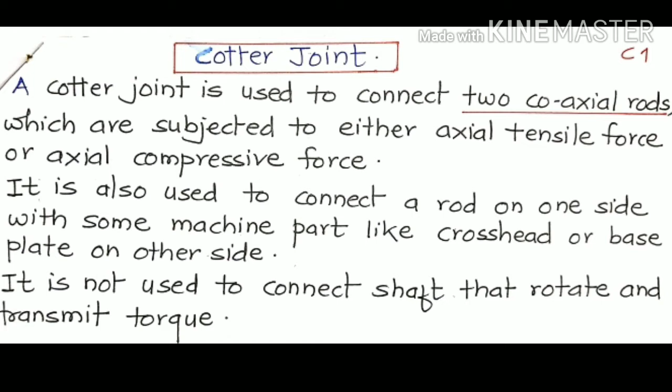So let us see what are its applications. Cotter joint is used between piston rod and crosshead of steam engine, also for a spindle and fork of valve mechanism, joint between piston rod and tail or pump, and is also used for foundation bolts too.

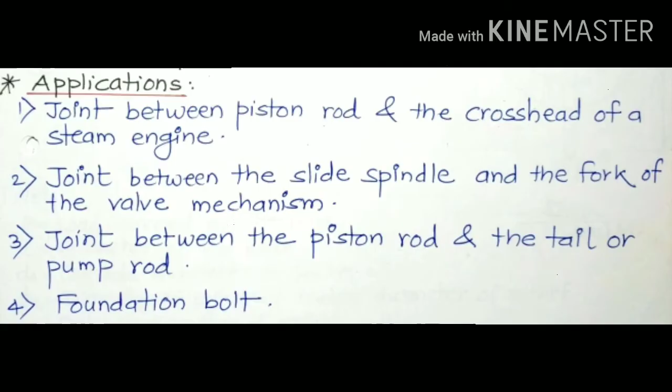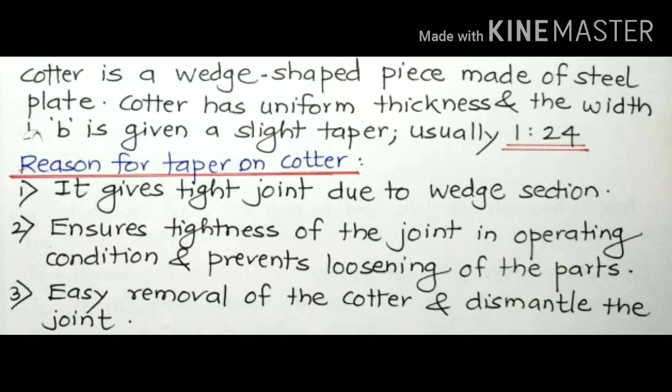Cotter is a wedge-shaped piece made of steel, having uniform thickness and given a taper on its width, that is 1:24. It is the joint between two parts which keeps it tight. It ensures tightness of the joint in operating condition and prevents loosening of the part, while also allowing easy removal of the cotter and dismantling of the joint.

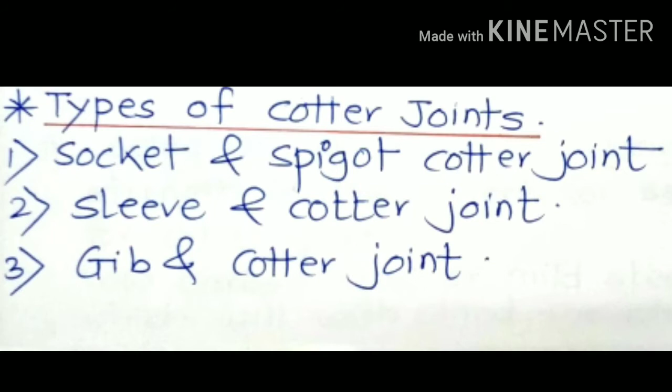There are various types of cotter joints. One is socket and spigot cotter joint, sleeve and cotter joint, and gib and cotter joint. Here we are going to discuss the socket and spigot cotter joint, so let us see how it is to be designed.

When a pull P is applied at both ends, spigot end and socket end, all these parts will be subjected to various stresses that we need to identify, and accordingly we will have to find out the area resisting these failures. Finding out the area resisting this failure is nothing but design, because design is finding out the minimum dimension which resists failure.

So if you look at the dimensions which we need to design here, or which we need to find dimensions of, these various parts are: one is rod, socket, spigot, cotter. So one by one we will see how it is to be designed.

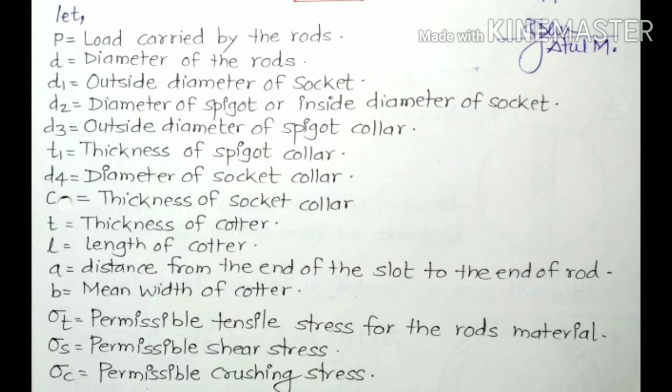Well, first we will see the dimensions. Here P is the pull applied, D is the diameter of rod, D1 is diameter of socket, D2 is diameter of spigot, D3 is diameter of spigot collar, T1 is thickness of spigot collar, D4 is diameter of socket collar, C is thickness of socket collar, T is thickness of cotter, L is length of cotter, A is distance, also known as spigot end, B is width of cotter, and C is socket collar end, and other stresses are also to be calculated.

Here finding stresses of various parts means selecting material for various parts and accordingly finding out the permissible limit of all these materials before going for the design.

Now material is selected from design data book. Here PSG design data book page 1.9 is used to select material for various parts.

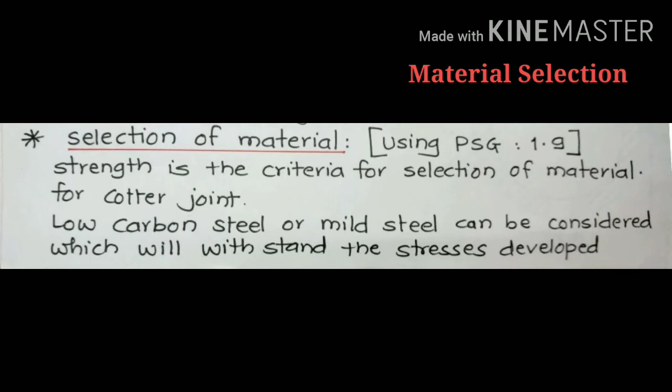Once the material for various parts, that is socket, spigot, cotter and rod, is selected, now we will start designing each and every part.

As we have selected material for each and every component, we know the resistance offered per unit area is stress. So we know the pull applied and we know stress for each material. If you want to calculate stress, that is the resistance, that is force offered per unit area, that is the area resisting failure, what we need to do is find out the area for each and every component. So sigma is equal to P by A, therefore P is equal to sigma into A. So we need to calculate area. Left hand side there is P, right hand side there is area into stress.

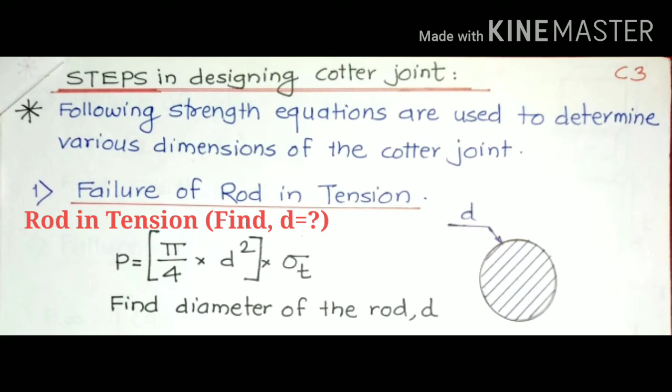Let us start with the rod. When pull is applied, rod is subjected to tension. So stress is equal to P by A, therefore P is equal to area into stress. Here area is pi by 4 D square, the area resisting failure being the area of a circle with diameter D.

Next part is spigot. Now if you look at a cotter joint, spigot is the part through which a slot is provided through which a cotter will go. So if you want to find out the area resisting failure in the weakest section of a spigot, it is going to be area of circle minus area of the slot for cotter. So that area is pi by 4 D2 square minus D2 into T. So P is equal to area into stress, which is the formula written here.

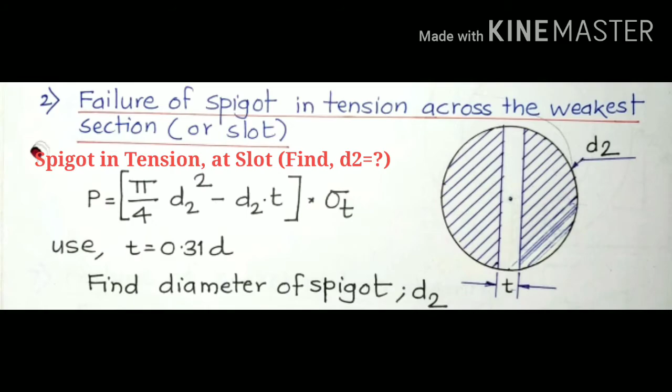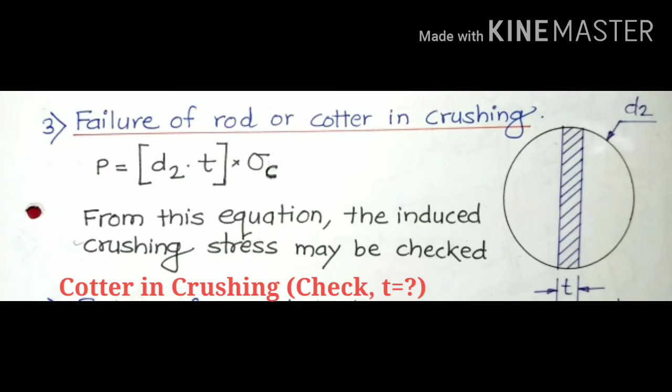Here thickness t can be considered as 0.31 times of D, or we can find out d2 into t by making use of the next equation, which is failure of cotter in crushing, that will give us d2 into t. As told earlier, we can find out d2 into t, which can be put in the earlier equation for failure of spigot in tension. So d2 into t is the area which resists failure of cotter in crushing. That can be found out with this equation, P is equal to d2 into t into sigma c, that is crushing stress. Now this d2 into t can be put in the earlier equation, and d2 and t can be calculated.

Next part is socket. If you look at socket and spigot cotter joint, the socket and spigot are held together with the help of cotter. The slot is provided in socket and spigot both, through which the cotter will go. Socket is going to fail in tension because of the pull applied at both ends, and the area resisting failure is the area between two concentric circles, that is socket and spigot, with the cotter creating a recess between these two circles. So area resisting failure is pi by 4 into d1 squared minus d2 squared, minus d1 minus d2 into t, into sigma t. That is how we find d1, diameter of socket, where d2 is diameter of spigot and t is thickness of cotter. By solving this equation we get d1.

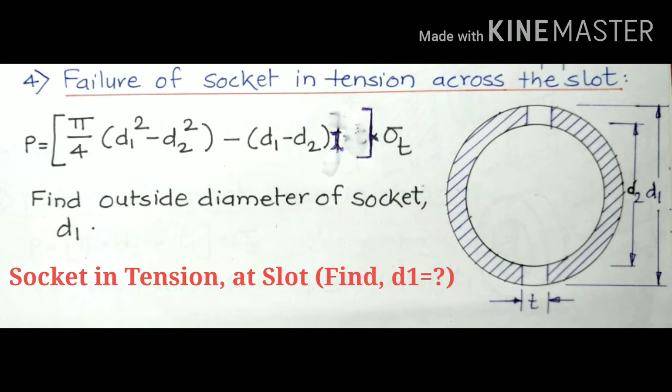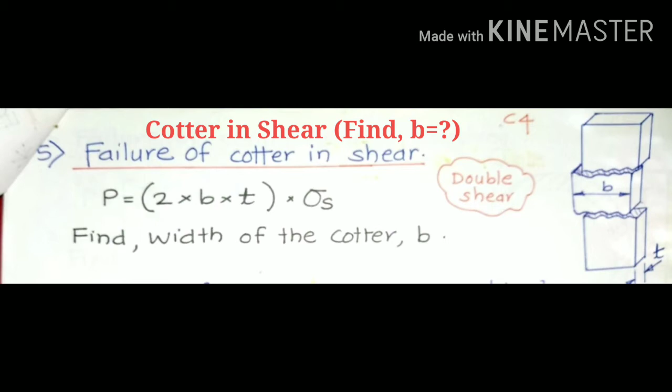Failure of cotter in shear. The cotter will fail at two places, that is double shear. So double shear means B into T, two times. The area resisting failure is 2BT, so the formula becomes P is equal to 2BT into tau. This will give us the width of cotter.

Next, how to find out diameter of socket collar, that is D4. That can be obtained by considering socket collar in crushing. The area resisting failure would be d4 minus d2 into thickness of cotter, t. So the formula becomes P is equal to d4 minus d2 into t into crushing stress. This is the way to find D4, diameter of socket collar.

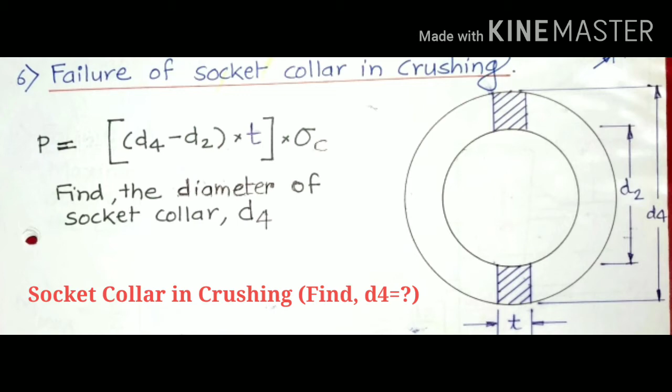Now let us revise what we have done. Till now we have calculated dimensions: diameter of rod D, by considering failure of rod in tension; diameter of spigot by considering failure of spigot in tension in slot; then we cross-checked thickness by considering failure of cotter in crushing; then failure of socket in tension, where we saw the socket, spigot, and the slot which is the weakest section, and calculated that area which gives us D1. So D1, D2 and thickness were calculated in the first 4 steps, and the 5th step was failure of cotter in shear, which gave us width because of double shear, and then failure of socket collar in crushing gave us D4. This is how we have calculated the first 6 dimensions by considering these failures. Now we will see what is next.

Next parts are socket collar end and spigot end. So spigot end is A, socket collar end is C, then spigot collar thickness T1 and spigot collar diameter D3. These are the 4 remaining steps. We will see them one by one: spigot end, socket collar end, thickness of spigot collar, and diameter of spigot collar.

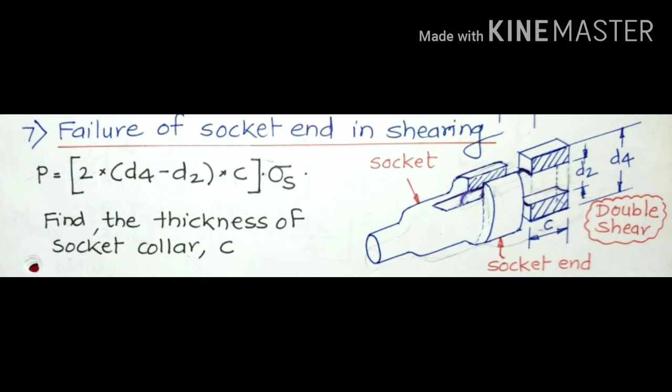If you look at socket collar end, it will fail in shear. When the cotter comes out safely, it will shear off the socket collar end, and the area resisting failure is, since it is double shear, d4 minus d2 into c, multiplied by 2. So 2 times of d4 minus d2 into c into tau will give us C obtained, that is socket collar end.

Similarly, spigot end A can be obtained by considering double shear of spigot end, that is A into D2, 2 times, so 2 A D2 into tau is going to give us A obtained, that is spigot end.

Next is to calculate thickness of spigot collar. If you look at the thickness of the spigot collar, it will fail and the ring will come out, giving us thickness of spigot collar obtained, that is T1. Pi into D2 is the circumference, with thickness T1 giving the area. So pi D2 into T1 into tau is the area into stress, which will give us the thickness of spigot collar obtained, T1.

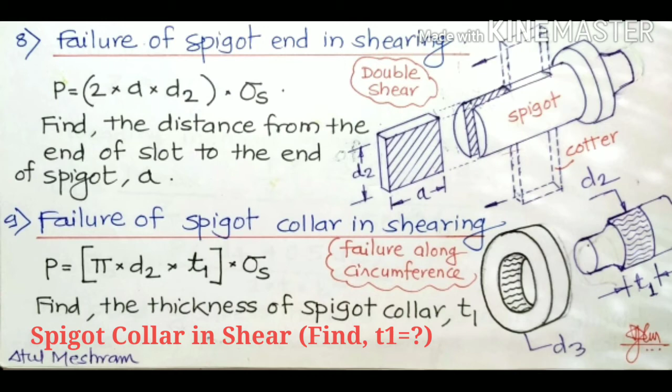Similarly, the diameter of spigot collar can be obtained by considering failure of spigot collar in crushing. The area resisting failure would be pi by 4 d3 square minus d2 square. This is how d3 can be obtained, the area between the diameter of spigot and outer diameter of spigot collar being the area resisting failure.

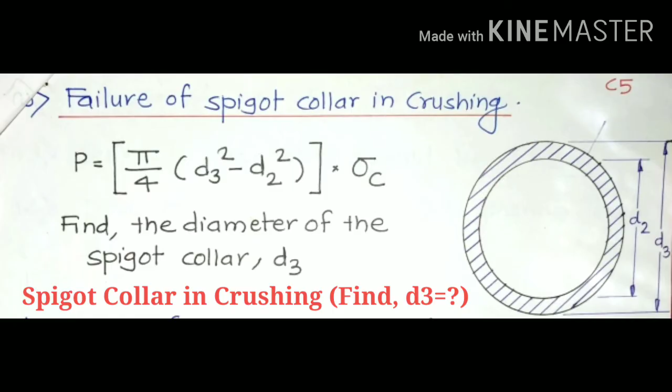Now after the first 6 steps, the remaining 4 steps were of spigot end, socket collar end, spigot collar thickness, and spigot collar diameter. So that is A, C, T1 and D3 obtained.

Now the 11th step is to find out the bending stress. Consider failure of cotter in bending. We know that bending stress is M by Z, bending moment divided by section modulus. The bending moment is calculated by taking section at the cotter.

One section is considered where P by 2 is acting and moment is taken, that is P by 2 into 1/3 of D4 minus D2 by 2 plus D2 by 2, minus at the other end, P by 2 into D2 by 4. This gives maximum bending moment, which when simplified gives P by 2 in bracket D4 minus D2 by 6 plus D2 by 4.

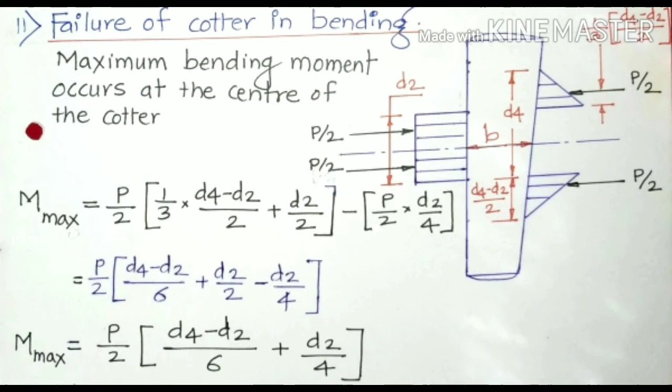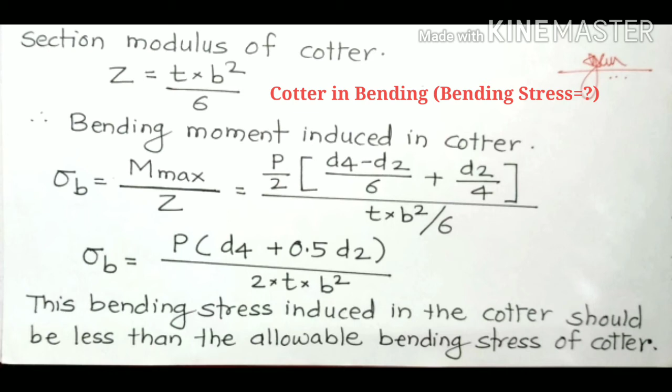This bending moment is to be divided by section modulus, which can be obtained at the cotter by taking I by Y, giving TB cube by 12 divided by B by 2, which is TB square by 6. So section modulus is TB square by 6, and sigma B equals M by Z, with M in the numerator and Z in the denominator. This is how bending stress is obtained.

This is how socket and spigot joints are designed, by finding out all dimensions with the help of these 11 steps. The few remaining dimensions are calculated using empirical equations. Length of the cotter is 4D, taper is 1:24, clearance is 2 to 3 millimeter, and E, which you can refer from the figure, is 1.2 times of D.

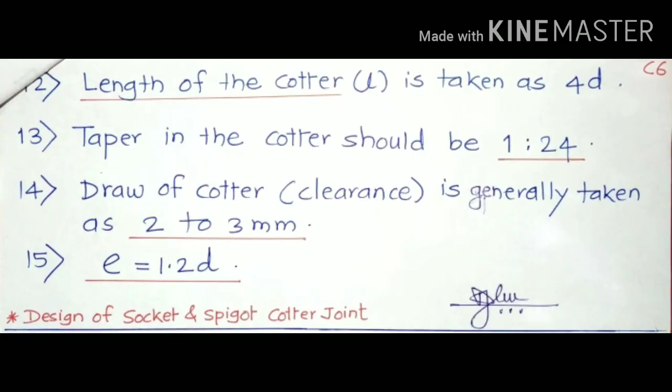So friends, here we have seen how to design the cotter joint, and there are various steps by which we have seen how it is to be designed. If you look at the socket and spigot cotter joint, we will come to know there are various stresses which it will undergo, including tensile failure of rod, socket and spigot.

How that failure occurs: rod will fail in tension, socket also will fail in tension in the slot, and spigot also will fail in tension in the slot. So these three are subjected to tension. When it comes to crushing, cotter will fail in crushing, socket collar will fail in crushing, and spigot collar also will fail in crushing. So D4, T and D3 can be obtained by crushing, these three steps.

There are few dimensions which we have calculated by considering shear failure. Here we can see A, B, C and T1, these 4 dimensions which come along P. So failure along the pull is considered in shear: failure of spigot end in shear is A, failure of cotter in shear is B, and failure of socket collar end in shear is C.